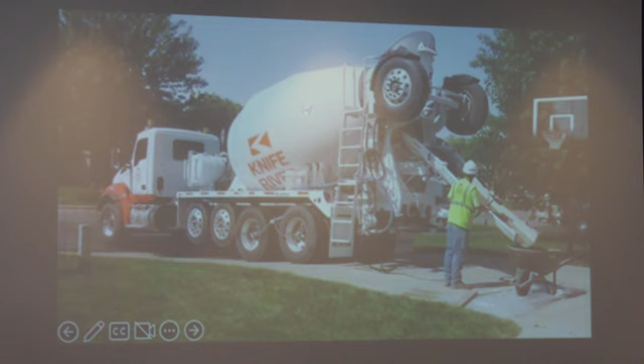Okay, technology and the future of work. The motivating belief and assumption in this debate has been that we now stand on the cusp of a new reality where the technological revolution in artificial intelligence and robotics will prove as transformative for our economic growth and human potential as were electrification, mass production, and electronic telecommunication in their times. It will be incredibly disruptive for current jobs, and it may also create new jobs. So some people will lose jobs, and some people will discover new kinds of jobs that are available to them.

Okay, let me take you through this analysis. I'm going to go pretty quickly, so if something is unclear, please let me know. So this kind of debate about the future of work really began in earnest in the 2010s. And the main focus of these debates, these analyses, these many working groups on the future of work was a quantitative estimation of the effects of technological displacement. And so you saw this analysis happen on a number of parameters: how many jobs will be eliminated, what percentage will be eliminated, and that ranged from between 13 to 30% by McKinsey, to others that said about 45% of work would be disrupted by new technology.

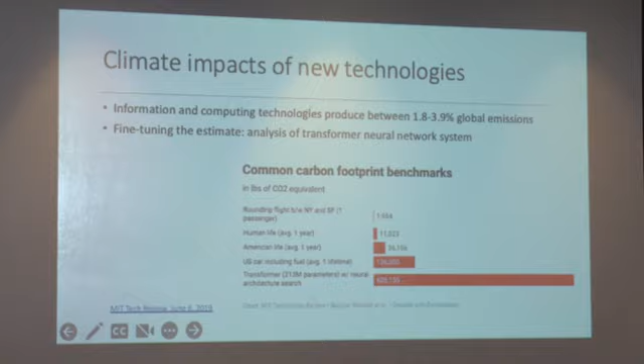Okay, climate change and the future of work. So recently, this is a new analysis that's really started just in the last few years. There's an emergent conversation about climate change and the future of work, and this analysis uses a just transitions framework, which focuses on the transition out of high carbon activities and into the green economy, and on the strategies to ensure that harm to workers, communities, and regions is avoided while maximizing the benefits of climate action.

The Infrastructure Act is projected to generate 4 million jobs per year over the next 10 years. The IRA, 9 million jobs over 10 years. And the Clean Air Act, which is one strategy that economists have been using to look at these questions retrospectively, has indicated that the job creation, job loss is kind of a wash.

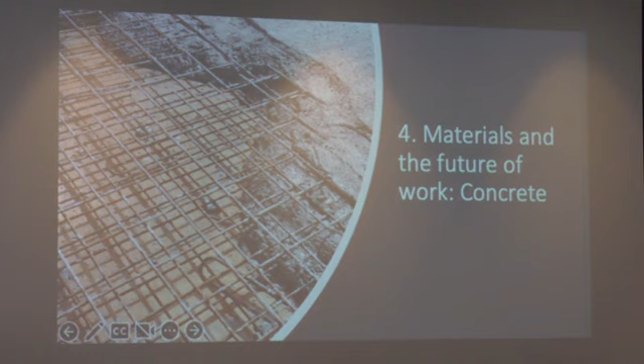So let me start by claiming, and I will illustrate this claim in a second, that the engagement with material requires the development of situated and relational knowledge of the material's properties, how it behaves in different contexts, and its different affordances, what it can accomplish, what it can do, okay? And that this knowledge that has been identified as the residual is actually crucially important for dealing with materials, and that not only do we need to value it, but if we want to innovate in this space and actually shepherd a green transition that is meaningful, that changes our material relationship, the economy's relationship to our material context, we need to actually grow this knowledge.

Okay, concrete. Concrete is ubiquitous. You may know this, it's second to water in terms of what we use most in the world. And its use is projected to increase about 40% over the next 30, 40 years. It is central to green jobs. It is essential to the transformation of our economies and the development of climate protective infrastructures. And it is also enormously damaging to the climate. Okay, so the manufacture and distribution of concrete globally represents about 10% of annual carbon emissions. So here is this material that is central to everything in our lives that we need to actually make a green transition, and that is intensively polluting.

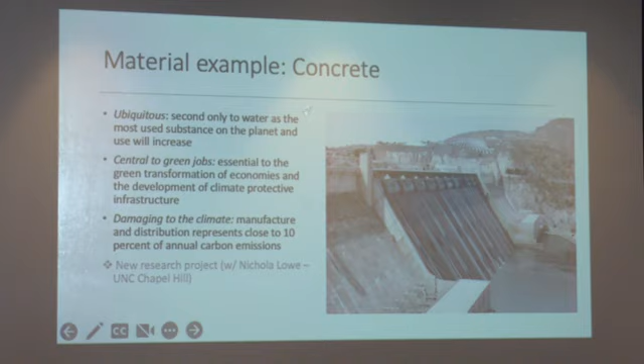Okay, so what is concrete? At its most basic, concrete is cement, which is a kind of glue, aggregate, which is gravel, stone, sand, and water. You mix those together and you get a concrete slurry, which is that gray, putty, mushy stuff. But that is not actually what concrete is. Concrete is the product of the way that we engage with it. So what you get in terms of concrete depends on how the ingredients are sourced and made.

So everything from the chemical process of making cement and quarrying and sorting the aggregate to the kind of water you use, how the ingredients are mixed, so how you design the concrete mix, the aggregate you use. Are you using sand? Are you using gravel? Does the gravel have hard edges? What is the gravel made of? The hydration level of the mix, and the actual process of mixing it.

How concrete is poured and cured. So is it poured on site? Is it poured into prefab forms? How do you manipulate it on site? Are you compressing it when you pour it? And what elements are you pouring it around? If you're pouring it around steel rebar, you're going to have a very different output than if you're pouring it with glass fiber, for example.

And then how the mix is used. So what building elements is it making? What reinforcements does it go around? What kind of load bearing is it doing? Is it doing compressive load bearing or tensile load bearing? Or is it decorative? Okay, and then finally, and very importantly, how the mix interacts with the environment.

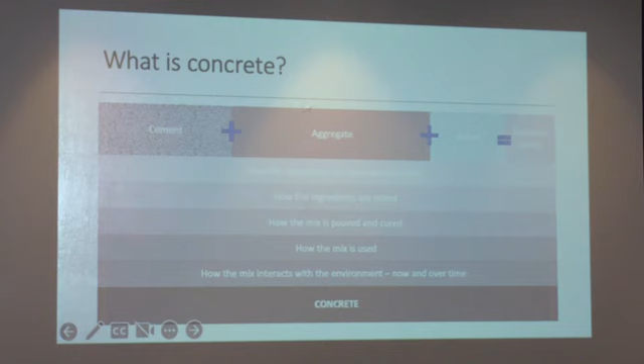So concrete responds to environmental conditions, both as it is becoming itself, as it is hardening. So cold, heat, humidity, wind, but it also responds over time. So a concrete mix that is poured a certain way, set a certain way, will respond very differently to certain kinds of climatic pressures than other kinds of pours. Only when you've worked through all of these layers can you actually say what you have as a product. In other words, this thing that we think of as a single material is a million different things. And what it becomes depends on how we engage with it. At each of those layers, how we engage with it is absolutely dependent on situated and relational knowledge processes.

So let me just tell you one little function, which is concrete curing, which is the process of concrete going from slurry to rock. So curing is a chemical reaction by which concrete gets hard. It takes about 28 days. It's the reaction between cement and water. And how concrete hardens depends utterly on the interaction between the hydration in the mix and the environment. So for example, in a very hot and dry environment, the challenge of the concrete workers is to make sure that the concrete pour does not dry too quickly.

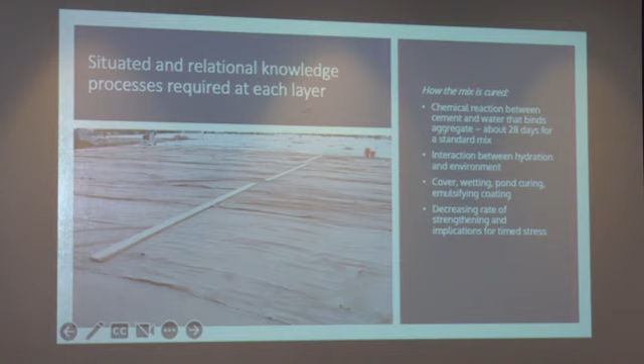But you have to be able to judge when it's safe to start building around it. And that is also done by feel, by eye, by experience. If you build around it too quickly, you will ruin the concrete pour and you will make your buildings vulnerable to the kind of collapse we have seen in Turkey and Syria. Okay.

Carbon dioxide emissions. So let me walk you through this a little bit. Most of the carbon dioxide emissions of concrete happen at cement. They happen through two main factors. To produce cement, you need to heat limestone up to 1400 degrees Celsius, and that produces about 40% of the emissions. But 50% of all of concrete emissions are produced through the chemical process by which limestone becomes concrete. And this process produces something called clinker, which is glassified lime. The rest of the process represents about 10% of concrete emissions. And in fact, concrete also absorbs some emissions.

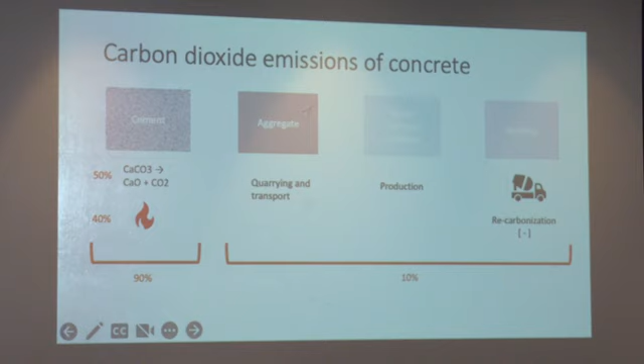Okay. We already have amazing legacy technologies in many cases to decarbonize concrete, to reduce the footprint substantially. In some emergent cases, we have the technology to make concrete net negative so that a building can function as a forest, can be a functional forest in terms of carbon footprint.

And these are at every point of this process, so adding different supplementary cementitious materials, like industrial byproducts such as slag and fly ash from coal plants, to carbon capture for the kiln. The aggregate, you can actually carbonize carbon dioxide into gravel. And I have some in my office. And that allows you to use carbon dioxide as the material with which you're mixing your concrete, and it becomes a carbon sink.

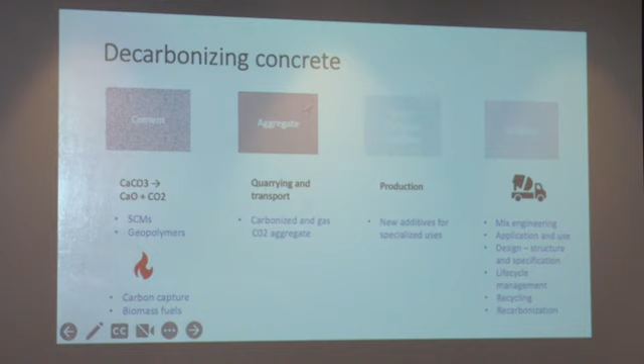You can use new additives, but most of the gains in terms of reducing the carbon footprint are in the building process. So how you design the mix, how you apply and pour the concrete, designing the structures so you use different concrete strengths for different elements, the management of the life cycle of the building, recycling of the building, and designing its demolition so that concrete can absorb the most carbon dioxide from the atmosphere possible. Okay.

In order to make these innovations work, you actually need a deep base of situated and relational knowledge processes. You need significant cross-disciplinary learning. The innovation occurs at different elements of the concrete mix and at different phases of concrete use and production, but their effectiveness depends on the situated and relational knowledge at other phases. So the effectiveness of the CO2 reductions at cement depend absolutely on the concrete, on the practices in building.

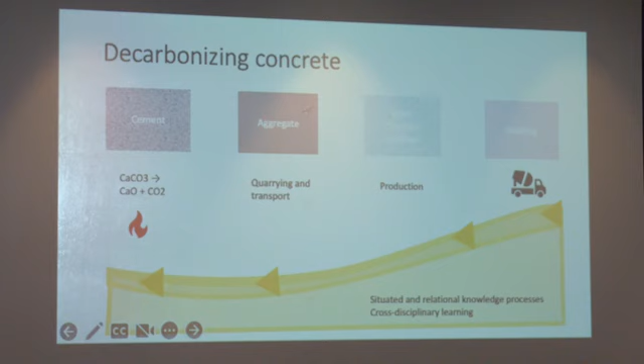Okay. I'm going to give you a concrete example because these are all very technical and abstract concepts. One innovation that is kind of 20 years old at this point is the addition of liquefied carbon dioxide into the concrete slurry. It's just a little bit, and the leader in this space says that it doesn't affect the concrete mix at all. In fact, it affects it in ways that are pretty substantial, but that you can adapt to if you have the correct and deep enough situated and relational knowledge. Okay, so let me talk you through this.

The carbon dioxide additive accelerates the chemical reaction between cement and water, which means that the mix engineering needs to be super, super precise. The mix ends up being drier and less malleable. So instead of a slurry, it ends up looking like dry dough. And so how you pour it and lay it matter a lot. You have to use really different hydration strategies, and you can't overhydrate. You have to apply it by compression, not just by pouring. And it achieves much faster early strength, but much slower, longer strength. So that has all sorts of implications for how you sequence building.

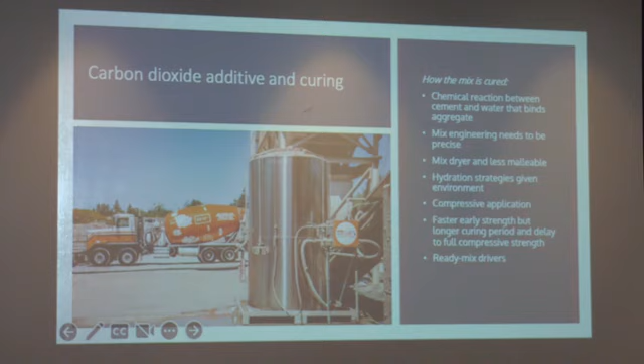And the people who are crucial in this process are ready-mix drivers, because they will educate the masons on site about what to look for in the concrete. They will translate the environmental conditions to hydration strategies for them. And they will also verify that the mix looks as it should, that the precision of the mix made at the plant actually translates to the concrete slurry delivered. Okay.

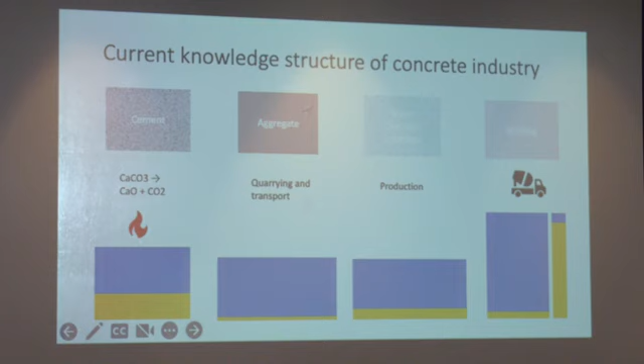I've said something about the importance of the relational knowledge, but the current knowledge structure of the concrete industry increasingly is pushing towards specialization and standardization of tasks. This has been the case even though these tasks are not being automated. This is a kind of a degradation of job quality. And I want to make the argument here that you can actually see this in the material, in concrete itself.

The way you can see it is in the intensity of clinker use. I told you that clinker is the glue. It's responsible for most of the emissions, and it's the least sensitive component to environmental conditions. So if you aren't sure about the weather, you can put in more glue. If you're not sure whether you can get the mix right, you just put in more glue. If you're not sure that your workers are skilled, you just put in more glue. If you're not sure how it's going to perform in different design elements, you put in more glue.

It's just like super glue. You just add super glue, super glue, super glue, and it's more durable. And it allows for the specification and standardization across contexts. You do the same thing if it's cold, if it's hot, if it's rainy, if you're building a tower versus building a floor.

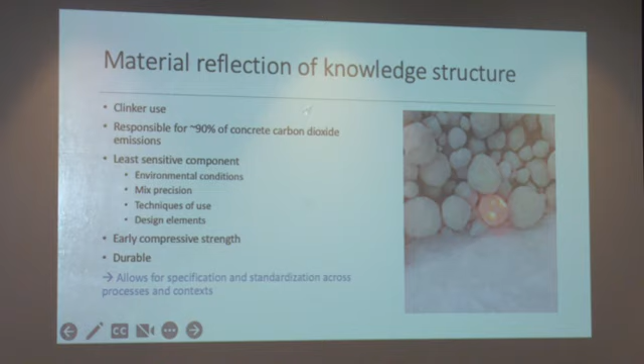So this material approach to work has all sorts of research and policy implications for us. If we were to take seriously that the future of work in a changing climate depends on our engagement with the material and not with technology, we would have to ask a different set of questions. What would it mean to reframe climate change and the future of work using a material approach?

What would it mean to consider the future of work in relation to situated and relational knowledge processes instead of how much can we standardize away and automate away? What would it mean to think about a just transition using the material? Okay, I'm going to tell you the implications in 3 different buckets: industry, work, and workers.

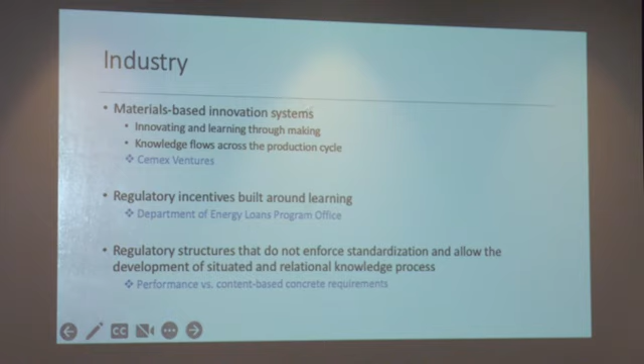The other thing is that we have regulatory structures in the US that impede innovation in this space, that impede adoption in this space. So for example, in the US, many local regulations will actually specify clinker content. They'll say you need to use 90% clinker, instead of saying you need to achieve this kind of strength.

Okay, work. So the implications for work are that we need to make existing situated and relational knowledge processes visible, and we need to value them. The US has this incredible shortage of ready-mix drivers, and the reason is that they're just paid for driving. They're not paid for everything else that they do.

So if you're just being paid for driving, you might as well take a job that pays maybe even a little bit more, where most of what you're doing is driving, and you don't have all of this other uncompensated work.

The other element in terms of work is that you need to promote and develop training institutions that develop situated and relational knowledge. In the US construction industry, we used to do that through unions. And we decimated our unions starting in the 1970s. And you also need to develop cross-disciplinary conversations about what kind of situated knowledge is required.

So designers and engineers that are using these new concrete mixes actually build ambiguity into their design so that they can have a conversation about what properties the concrete needs to have for this particular wall. Is it load-bearing? Is it a foundation? Is it decorative? How do we adjust? Okay.

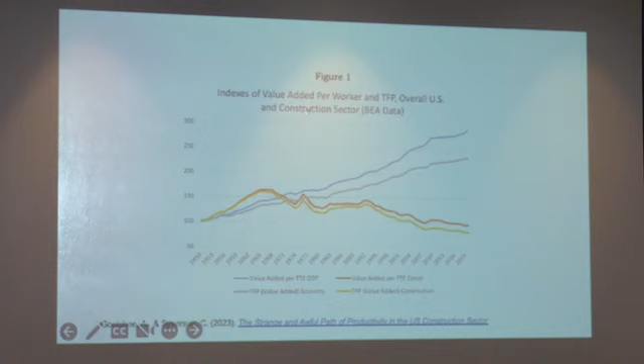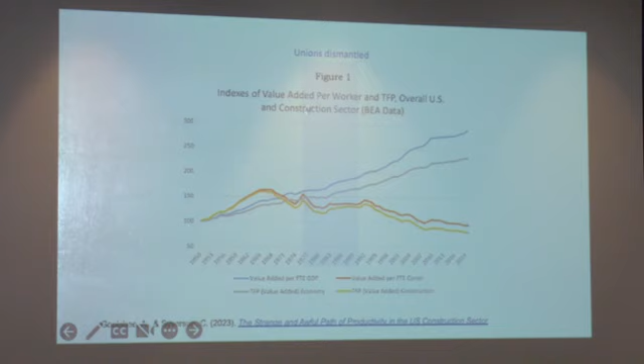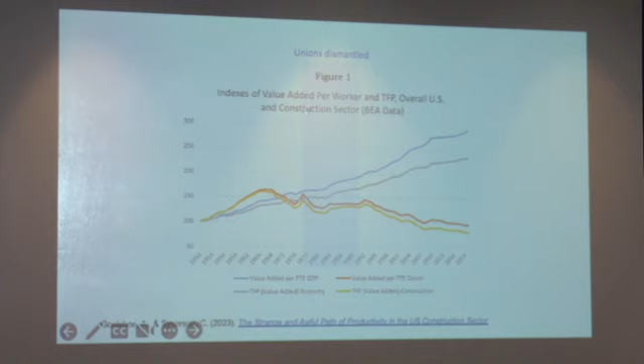It looks like a really sad tale, and there are lots of explanations for why. To me, this is not a mystery. This is the point where unions were attacked in the US and dismantled, and these were the training institutions that really focused on developing this situated and relational knowledge, and ever since then, the construction industry has focused on these very specified, narrow tasks, and that has affected productivity.

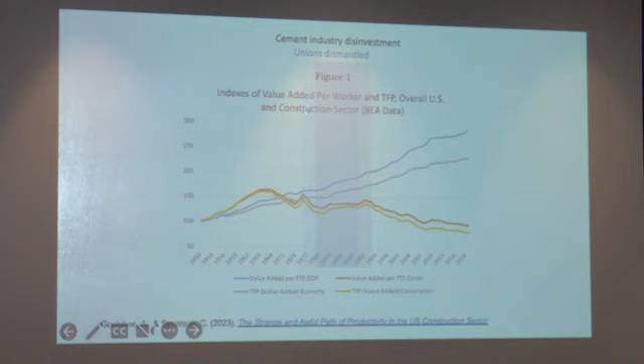In terms of concrete, this is also the time where the US disinvested in its cement production, and so is not an innovator at all in this space. And taken together, this is disinvestment in situated and relational knowledge processes. As an aside, you can see that the wages also dropped here as a result of the destruction of unions. Okay, workers.

For situated and relational knowledge processes, you need workers. You can't automate this stuff out. You actually need people to engage with the environment, with the material, and problem solve on a moment-to-moment basis. For this, you need to do two things. You need to improve job quality to attract and retain workers, and you have to recognize and compensate their skill.

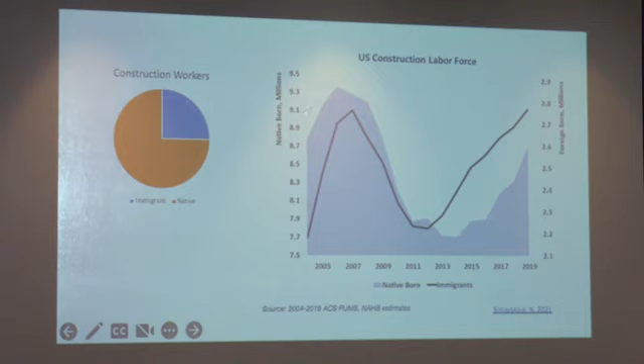Okay, the other problem is that construction workers are older. A quarter are 55 and above, and the retirement age is 61. The older workers, who were trained when unions were still alive, are the repository of this situated and relational skill. The US construction industry already depends very heavily on immigrant workers. It's a quarter nationally, much more in certain markets, and you can see over time that has become a structural feature of the construction industry.

But our immigration policy over the past several years has led to a deficit of immigrant workers in the economy. If we were just following the historical norms, we would have 2 million more workers. So all of the drama about, oh my God, the border, blah, blah, what it's hiding is that we actually have a deficit. And that deficit is not taking into account all of the jobs that will need to be filled due to the environmental policies that we've passed. So in other words, you need workers for this green transition, but you need workers with full rights.

Staffing this green transition with undocumented workers has all sorts of implications for the construction industry. It affects job quality, but more importantly, and this is based on some of my own research, which I'm not going to go into now, the legal status of workers affects the recognition and the application of their situated and relational knowledge processes. So even when workers come having this, if they do not have legal status, their skill is not incorporated into the industry. So you need an immigration reform to allow for increased immigration with full rights.

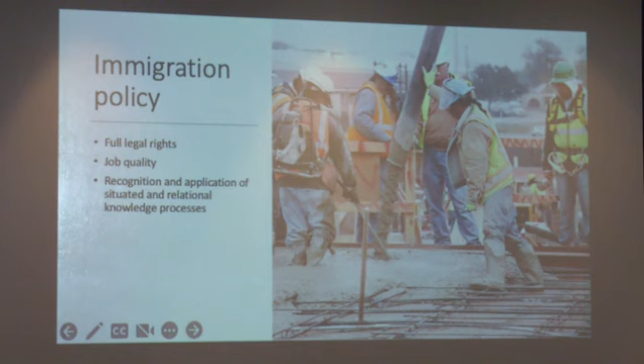Okay, so the recap. In industry, you need to create cross-disciplinary institutions and practices to foster the development of situated and relational knowledge about material and processes. For work, you need to create and strengthen training institutions and the valuation of worker expertise. And for workers, you need to expand the base of work and workers to retain skilled workers, okay? And then this is where I'm going to end.

And I'm going to tell you the story about CEMEX and ready-mix drivers. So CEMEX is a main innovator in this space. They already have a lot of green cement mixes, and they're trying to get the US market to adopt these mixes. They have some penetration in the US market. The mixes are ready. There's some appetite in California and other places to use these mixes.

But what they cannot find are ready-mix drivers. And without the ready-mix drivers, there is no one to be the bridge between the cement company and the end user of the concrete, to educate the builders about the properties of green cement, or green concrete rather, and how to use those mixes, hydrate them effectively, measure their first strength and their last strength. Without these ready-mix drivers, you will never have a transition to low-carbon cement.

The short answer is no. There are lots of companies now in the U.S. like these. The U.S. is sad when it comes to innovation in this space. I just have to say it. There's lots of little startup companies that are trying new technologies. If you compare this to how other big cement companies are innovating, it's just little innovations on the margins. But even with those innovations,

what you are seeing is that there's a huge demand for the innovations that exist by some companies. So for example, in Silicon Valley, a lot of companies have reputational reasons for using low-carbon cement, so tech companies want to use low-carbon cement for their new campuses, their new buildings, whatever. But the companies that produce this stuff in the US don't have the capacity. So it's not about cost, it's just they can't get enough of it from these companies.